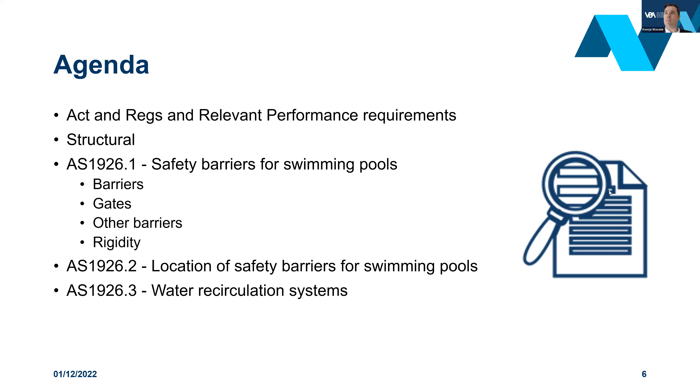So we've got our first poll question to come up, and hopefully most people have a bit of an idea about this one. Statistically, evidence shows us that the majority of drowning deaths in private swimming pools are children under 2, children under 5, or adults under the influence of alcohol.

We'll just wait for a few of the results to come through there. So just repeating that again: the statistical evidence shows us that the majority of drowning deaths in private swimming pools are children under 2, children under 5, or adults under the influence of alcohol. Hopefully we're getting some of those results coming through now.

All right, so hopefully we've got those results now coming up. And yeah, the majority of people have gone for children under 5, and that's the correct answer there. Adults under the influence of alcohol are highly represented in drownings in waterways and rivers and the like.

All right, so we'll move into the next part of the presentation. So just some background on the audits.

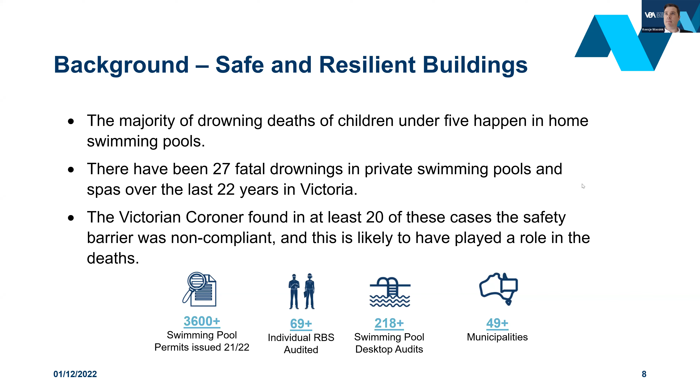So the regulatory requirements for swimming pools. A building permit must be obtained to build a new or alter an existing swimming pool. Regulation 28 of the Building Regulations 2018 sets out, among other things, that a building permit must clearly show the location of the swimming pool and spa and the barrier on the allotment, and demonstrate the barrier's compliance with these regulations. The building permit should also include the precautionary measures for both before and after the swimming pool is filled with water. This includes temporary fencing.

Swimming pool is a defined term in the Building Act. It means any excavation or structure, including a spa or relocatable structure, that is capable of containing water to a depth of 300 mil, and most importantly, that is principally used or that is designed, manufactured or adapted to be principally used for swimming, wading, paddling or similar activities.

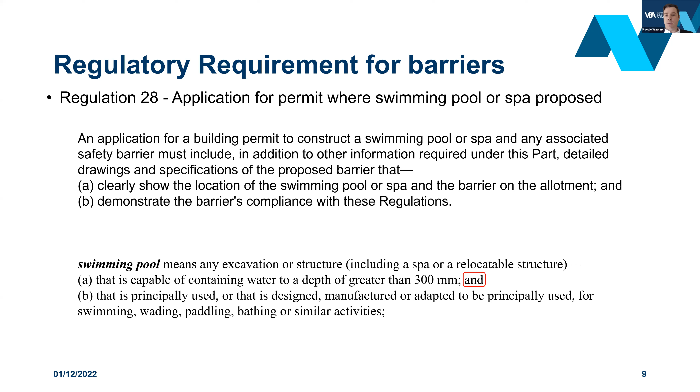Firstly, we'll discuss the performance requirements we considered as part of our audits to determine compliance with Regulation 28. The key considerations in the building code were performance requirement P2.1.1, structural stability and resistance; P2.2.4, drainage from swimming pools; P2.7.1, swimming pool access; and P2.7.2, swimming pool recirculation systems.

In the absence of a performance solution, the audit considered that a DTS solution was being adopted and considered whether compliance was demonstrated against the relevant DTS clause, including the Australian standard.

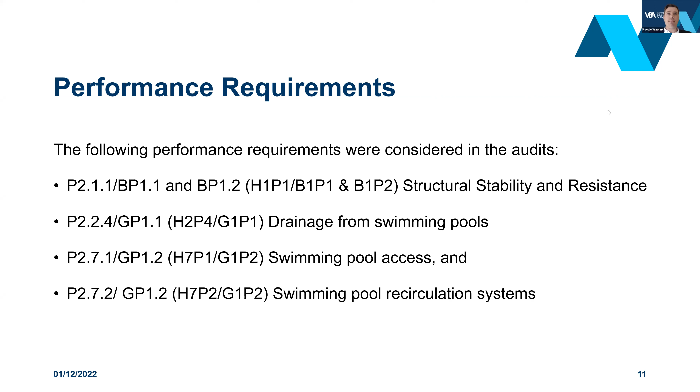So the top non-compliances, these are the ones where we did have sufficient information to see. These were the top non-compliances identified: gates swinging inward rather than outwards, landscaping features reducing the barrier height including steps and retaining walls, encroachments in non-climbable zones including pool equipment, and gaps under barriers not less than 100 mil.

Where these material non-compliances were identified, the RBS was required to provide evidence that the as-constructed pool was compliant.

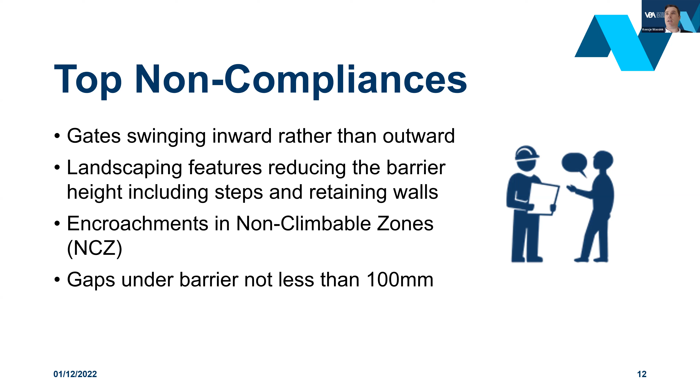We'll move into the first performance requirement we looked at, being P2.1.1, structural stability and resistance. The performance requirement in Volume 1 and Volume 2 are basically the same, and they set out a requirement for buildings and structures to comply structurally, including the design actions that must be considered. Depending on the form of construction, the performance requirement for structural could be satisfied using a DTS solution. The DTS options to satisfy the performance requirement are set out on the screen for each volume, and these requirements are consistent across the volumes. As I mentioned, in the top corner I've got the NCC 2022 version or equivalent.

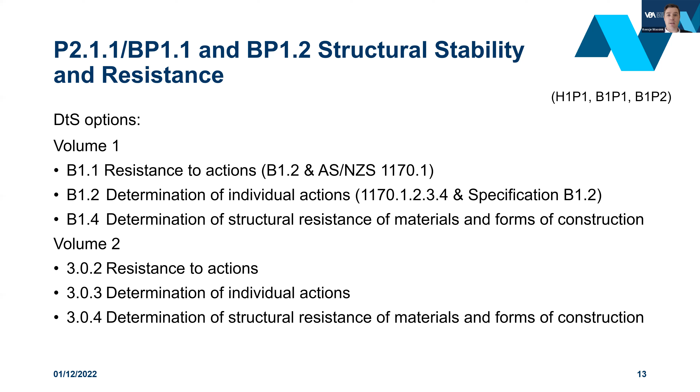In 88% of the audits, there was sufficient information to determine compliance for structural provisions. This is a really good outcome. Most RBSs here relied on certification from a structural engineer. These certifications were to AS 3600 for concrete pools and AS 1838 for fiberglass pools. It's noted that AS 1838 for fiberglass isn't actually a reference standard in the NCC, so it's not actually DTS, it's a performance solution. Currently we're working with the master pool builders to hopefully get this into the next NCC as a referenced standard so that it can be DTS in the future.

So some key considerations for structural when issuing permits and designing for swimming pools are AS 3600 for concrete pool design, AS 1838 for fiberglass pools, the bedding material used under the pools, the drainage around it, and standpipes around fiberglass pools to help reduce the water level, as well as the soil classification.

I think the soil classification is one of the really key things with swimming pools. It's important that when we get a fiberglass design or a concrete design from an engineer, we check it against the soil classification, and also make sure we've got the right drainage around the pool.

Because if the soil becomes too wet and expansive, it may cause pool heave and the pool coming out of the ground. We've seen a few VCAT cases where the soil is a lot wetter than expected, the pool's coming out of the ground or it's cracking, causing trouble for builders and clients as well.

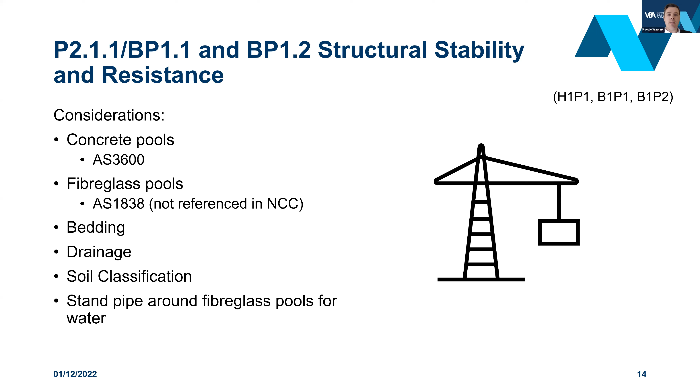So moving on to drainage requirements. P2.2.4 sets out drainage from swimming pools, stating that swimming pools must have adequate means of draining the pool in a manner which will not cause illness to people or affect other property. There are no deemed-to-satisfy provisions for swimming pool drainage in volume 1 and volume 2.

We're currently working with the master pool builders to develop a proposal for change to the NCC to introduce some deemed-to-satisfy solutions to help make this easier to deal with.

Whilst there's no DTS, the main way we saw this handled in 19 audits was to have a sewer connection - basically connecting the drainage part to the sewer.

When doing this, there's a few things that need to be considered. One is making sure you have approval from the relevant water authority, because in some circumstances the sewer system isn't actually adequate for handling drainage of a swimming pool, and the water authority won't allow it, so a different solution may be required.

Another thing is that volume 3, the plumbing code, does have a DTS pathway when using the sewer, but you'd first need to start with a performance solution in volume 1 or volume 2, and then the plumber can use the DTS provisions when installing that connection to the sewer.

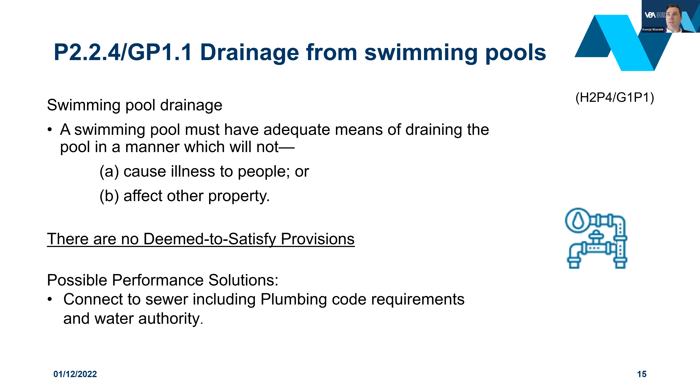So next we'll talk about swimming pool access, and this is going to be more about the barrier now.

Performance requirement P2.7.1 swimming pool access sets out that a barrier must be provided to a swimming pool and must be continuous for the full extent of the hazard, be of a strength and rigidity to withstand the foreseeable impact of people, restrict the access of young children to the pool and immediate pool surrounds, and have any gates and doors fitted with latching devices not readily operated by young children and constructed to automatically close and latch.

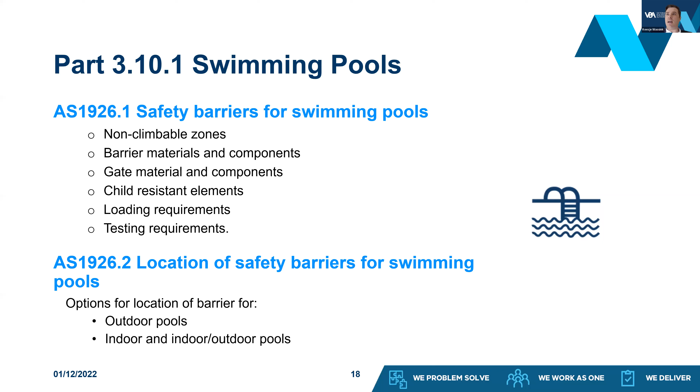The common trends we found, shown on the screen now, were generally for non-climbable zones: where there was sufficient information to determine compliance, the compliance was achieved. So that's really good - the plans were accurate when presented.

The non-compliances we did identify included pool pump equipment that would facilitate climbing in non-climbable zones, a retaining wall encroaching in the non-climbable zone and reducing the effective height of the barrier, an internal step encroaching into non-climbable zone 4 reducing the internal height of the barrier, and a boundary barrier that was 1700 rather than the required 1800.

With insufficient information to determine whether compliance was achieved: the height of all portions of the barrier not nominated - maybe they'd noted one side as 1200 but never specified the boundary barrier or similar; also not including the height of boundary barriers; and where barriers intersected with a boundary barrier, there was insufficient information to determine if the non-climbable zone had been complied with.

There were a lot of generic guides included in the permit documentation, but they were not relevant or contextualized, so it was unclear where the requirements needed to be implemented, left to the reader to interpret, which can lead to incorrect implementation on site. Our proactive inspection team has been out on site and found a lot of issues with barriers - I think there's a linkage where people have these lists of things they can do but don't actually know what they're meant to do in which area.

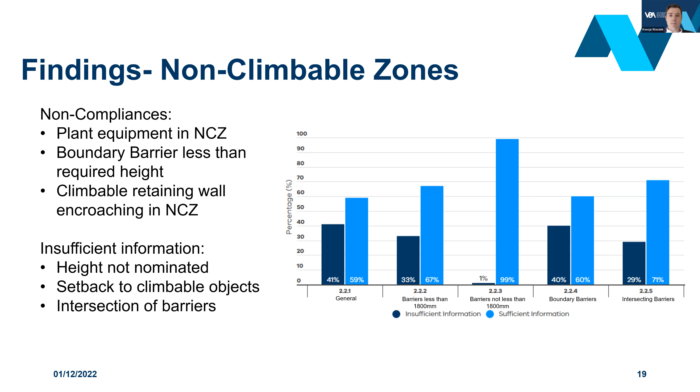So what is required for non-climbable zones? The plan should nominate the height of all sections of the barrier, the setback of any surrounding structures or items that may infringe on the non-climbable zone, and the intersection of barriers and the width of those barriers.

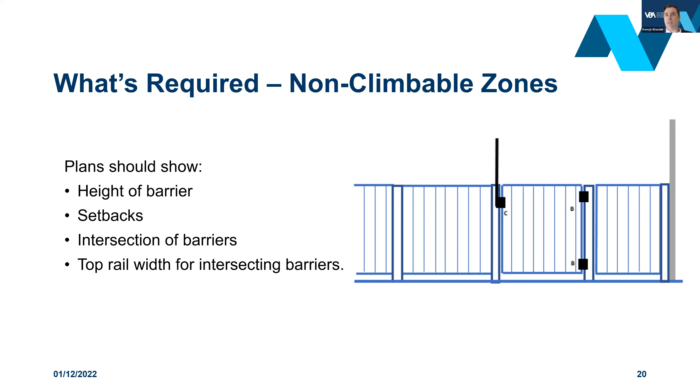I've got an example here, which one of my colleagues kindly helped with. This is an example of how a site plan might look, and it's quite detailed - we've got a few different scenarios going on here. When you're doing just a swimming pool you might not have as much information, but we've tried to cover off every possible scenario you might get in the standard.

With this pool, we can see it's got a 1200 high aluminium fence. There's a legend here, and we can see the east, south and west boundaries. So I know I need to check those have NCZ non-climbable zones for the 1200 high fencing.

I'll need to check that the rigidity testing of this element has been passed as well. I can see there's a boundary fence which is 1800 high, so I need to check it has the internal non-climbable zone of 900 down from the top of the boundary barrier, being non-climbable zone 5. I'd also need to check the width of the top rail or surface intersecting to make sure it's more than 50 mil wide.

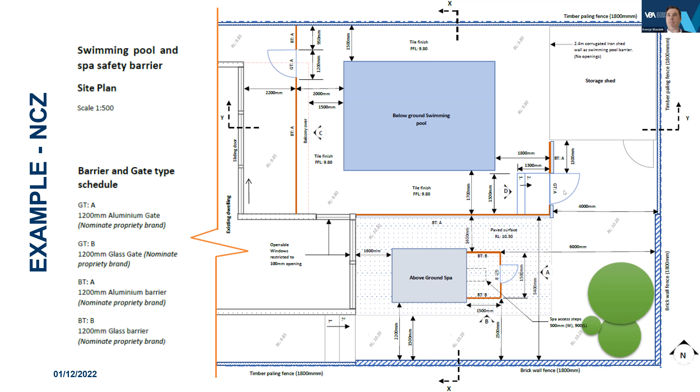So we'll move now to some of the findings with barriers. Like the non-climbable zone, the barrier section of the standard had high compliance rates where the information was detailed.

The need to have features and objects around the barrier identified on the plan, to ensure they do not facilitate climbing or encroach in the non-climbable zone, is highlighted in the coronial inquest into the death of baby Lauren. The barrier for the pool in which she drowned incorporated a barbecue structure. Whilst the coroner couldn't conclusively determine that is how access to the pool area was made, this structure incorporated features that may have facilitated climbing the fence and gaining unsupervised access to the pool area.

So one of the non-compliances we picked up with the pool barriers was the ground clearance between the barrier and the ground. On a particular site, the distance was 200, rather than less than 100 as required by the standard.

Also, with insufficient information, we had setbacks to features and objects near the barrier that may reduce the height, such as retaining walls, not shown. Glass barriers not specified to AS 1288. Fencing material was not nominated, so it couldn't be determined whether it was perforated material, or if there were surface projections or indentations, horizontal components within the non-climbable zone, or that gaps between vertical components were less than 100mm. Also, clearances between the bottom of the barrier and the ground weren't nominated on the plans.

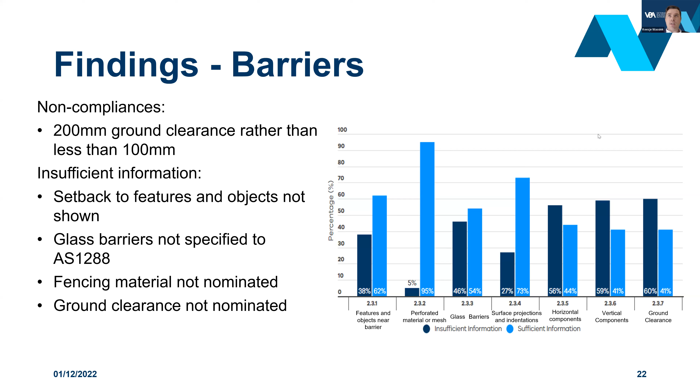So what's required for barriers? You should have setbacks to features around the barrier. The glass barrier should be specified to AS 1288. The fencing material should be nominated, including whether it's perforated material or mesh, and the spacing of any vertical or horizontal components. The ground clearance should be nominated as 100mm or less, with finished ground levels shown, especially where there's a level change on the plans.

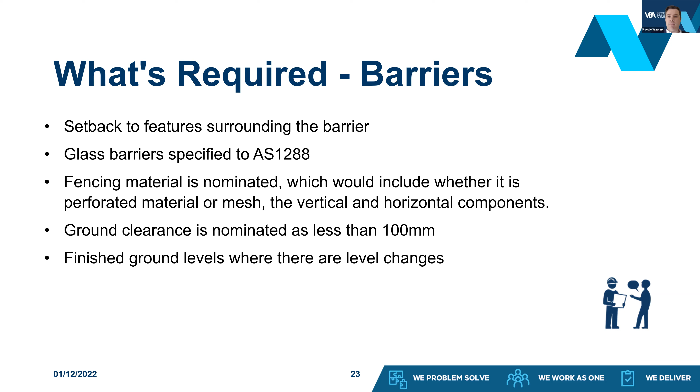So moving on to gates now. Gates are one of the most critical elements in pool barriers. It's acknowledged that most children who drown in a pool protected by a barrier gain access through the gate or door set. Therefore, it's crucial to ensure that the gate is compliant.

The importance of the gate latch was highlighted in the coronial inquest into the death of baby M in Melbourne's west. Baby M drowned in a home swimming pool that was fenced but had a faulty latch. Due to the faulty latch, the child was able to enter the pool area unsupervised. The failure of gate latches has also come into question in a number of other coronial inquests into children drowning. The coroner concluded in baby M's case that the death was preventable, which is why it's critical that when approving swimming pool barriers you have information on the gate latching device and hinges to ensure the product meets the required standard.

So some non-compliances we identified were inward swinging gates and the arc of operation of the gate not being clear. For missing information, we didn't have the gate's location, no details of which way the gate was meant to swing, no details of the ground clearance under the gate similar to the rest of the barrier, no details of the self-closing device or latch operation, and no details of shielding of the latch or the gap between vertical members where required.

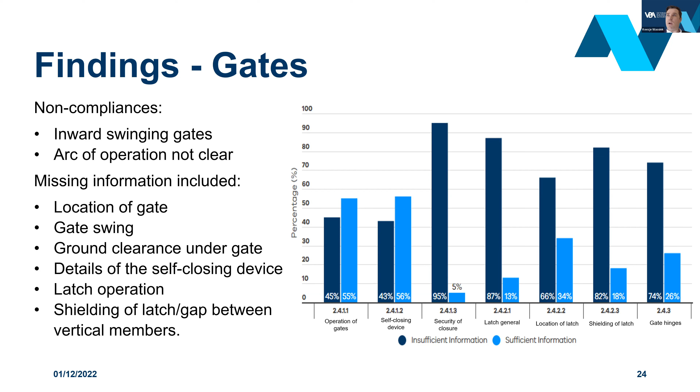So here's another poll question, this one's about gates. When a gate unit is tested in accordance with Appendix F of the standard, it should be capable of complying with the standard after how many operations? A) 1,000, B) 5,000, C) 10,000, D) 100,000. So this is about how many times the gate should be able to operate effectively, opening and closing and latching, before it fails.

I think one of the outcomes of the other coronial inquest was that the coroner suggested looking into these testing requirements, because the gate hinge may have been the reason why the gate hadn't latched properly and allowed the child access to the swimming pool area.

Hopefully everyone's getting some answers in. All right, so we got a mix of results there, and 63%, the majority, are on the mark. It's 10,000 operations that it needs to comply with.

All right, so we'll move on to what's required now for gates. The plan should show the gate location and that the gate is outward swinging. The gate self-closing device should be nominated. The latch that will automatically operate on the gate closing and prevent it from being opened without being manually released should be shown, along with the latch location. If the latch is less than 1,500mm, there shouldn't be any openings greater than 10mm, or the latch should be shielded. The gate hinges should be specified, and the ground clearance of the gate should be specified.

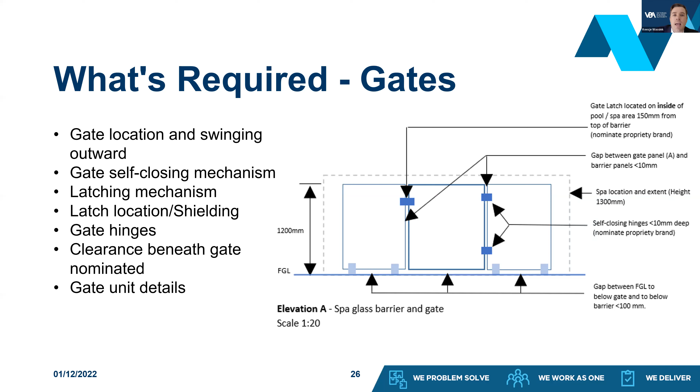I can see that the ground clearance is less than 100 mil. There are still a few other items I'll need to check off from some of the other plans, and we saw on the other plan that the gate was swinging outward and the arc was clear. I'd also need to look at the evidence of suitability for the gate unit, and with this one that's been specified, the glass is specified to AS 1288. So now moving on to other barrier components.

Some non-compliances we found here were a pool wall that was 1 metre rather than 1200 being used as part of the barrier. And for missing information, we had retaining wall heights not shown, pool wall heights not shown were utilised as part of the barrier - this is similar to the spa we had in our first example. There were also no details of the child-resistant openable portion of the windows, and no details on the setback of the balcony overhang, so we couldn't work out whether the balcony needed to comply or was outside of the non-climbable zone.

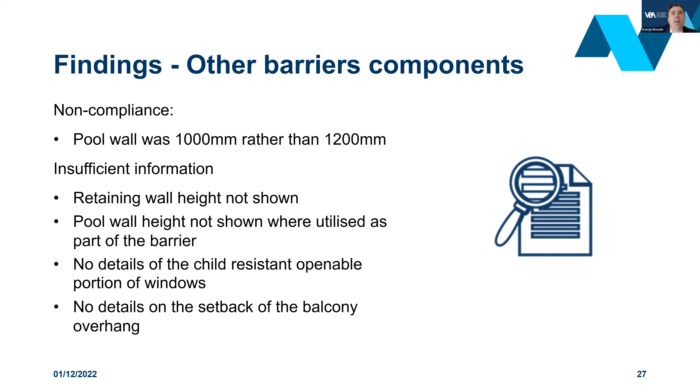So what's required for other barriers? We should have the finished ground levels, height of the retaining wall, details of the child-resistant openable portions of windows, details of child-resistant door sets - this wouldn't obviously apply to an outdoor pool, but it would apply to indoor and indoor-outdoor pools - details of any balconies and their setbacks, and also pool and spa wall heights when they're incorporated into the design.

So we've got this example on the screen here, and I can see from the site plan that the spa wall is part of the barrier, and that it's 1300 high. There was also a window that was going to be restricted to 100 mil, so I'd need to check that and make sure it's got that restriction with the tool and it can't be opened.

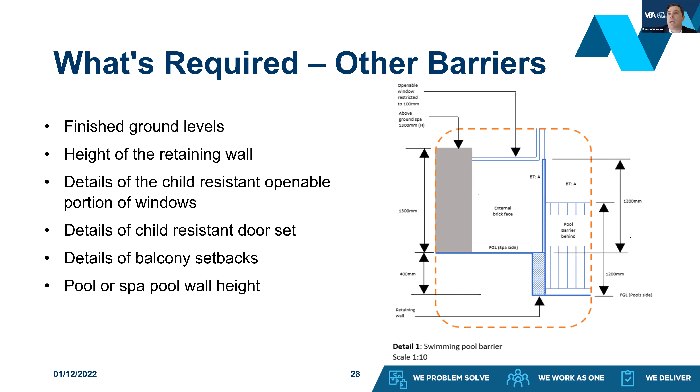Moving on now to section 3 of AS 1926.1, that's the loading requirements, and this is basically the loading for the materials that we're using in the fencing.

Where test reports were provided, these were accurate and demonstrated compliance. Generally though, there was no evidence that the material would comply with these tests due to a lack of evidence of suitability, and the material also hadn't been nominated to start with, so we didn't know if it was glass or aluminium or timber or something else.

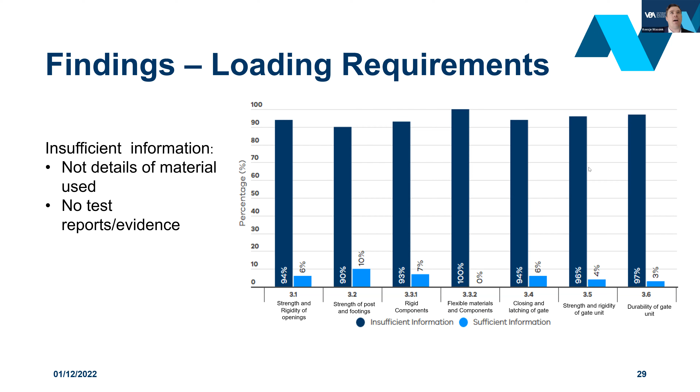So we've got another question coming up now, to do with loading and rigidity. The question is, do you need to test a glass barrier against the Appendix C strength test for rigid barrier components? Appendix C sets out the requirements for how we test barrier components to make sure they will be suitable for use.

Hopefully that's popping up on the screen now. I'm not sure if it's come up yet. Yep, there we go - just yes or no, do you think a glass barrier needs to be tested to Appendix C?

Hopefully everyone's getting their answers in. We know from earlier on that we talked about glass barriers needing to be designed to AS 1288. We'll close this poll off quickly and we should have the results up now.

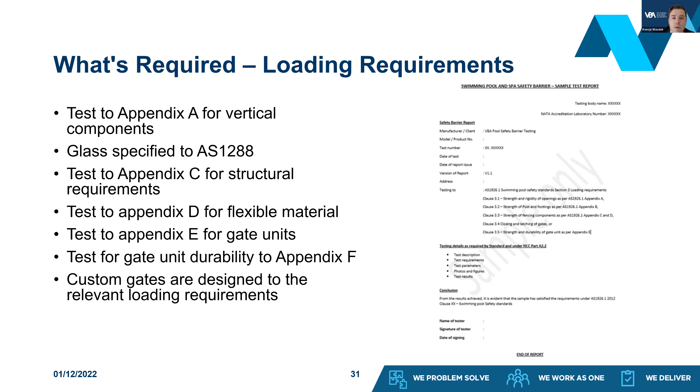Moving on now to the last part of the requirements. Performance requirement P2.7.2 swimming pool recirculation systems sets out that a swimming pool water recirculation system must incorporate safety measures to avoid entrapment of or injury to a person.

Part 3.10.1 swimming pools specifies that P2.7.2 for water recirculation systems can be satisfied via DTS solution by complying with AS 1926.3. AS 1926.3 sets out the requirements for skimmer boxes and other permanent water outlets in swimming pools and spas, and includes the sizing of skimmer box components, materials, testing requirements for outlet covers, and testing for alternative skimming systems.

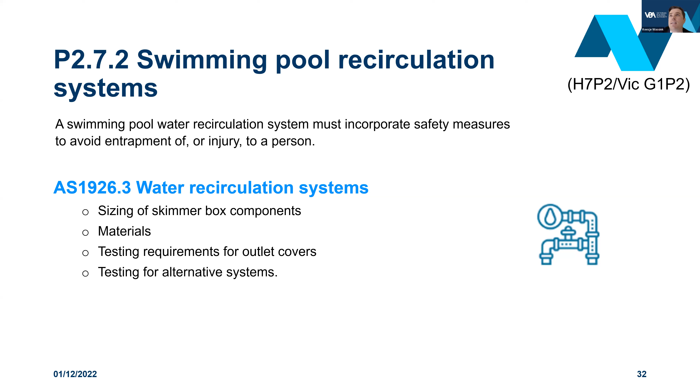What we found with water recirculation is there was basically not a lot of information in a lot of the plans. Where there was sufficient information with test reports to support the product being used, they were compliant. The common trends were no details of water recirculation devices, or only a manufacturer's brochure had been provided, which did not show any details of the system, how it complied, what size it was, the test reports that show it works and meets the standard, and also not having sizes of coverings and openings.

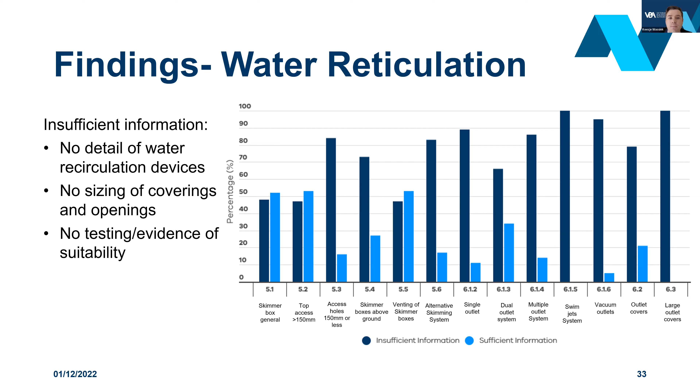So I'll go now on to what's required for this: the sizing of the skimmer box components, including the top access hole size, skimmer box venting systems, what materials are being used in the skimmer box, testing requirements for the outlet covers, and testing for alternative systems where they're used.

Where required, the basket access hole is set back at least 100 from the edge of the pool. This should be shown on the plans - when you've got a skimming system with this, you need to show where it is and the setback from the pool edge. In one of our audits - actually two, from the same building surveyor - everything was perfectly right, and this one little thing was missed. So that's one to watch out for.

And the importance with the water recirculation is to avoid entrapment. There have been a few drownings, or near drownings, and they weren't actually kids - they were adults swimming in the pool who got their hair or something trapped in it, and they got caught under the water and couldn't resurface.

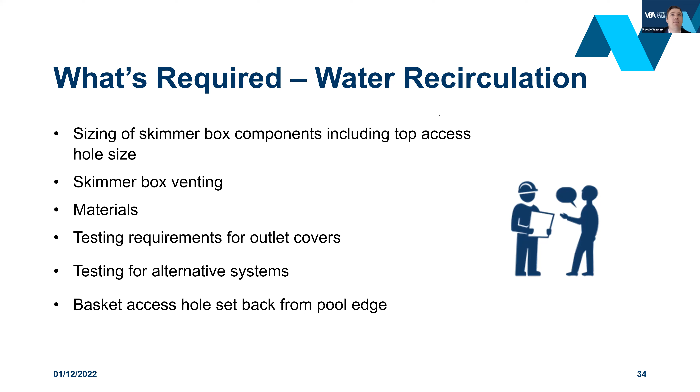All right, so the last thing I will talk about, and this is kind of outside of what we audited, but it's something that's popping up in prevalence now with people looking for different and more eco ways of designing their pools - these are your natural pools, your swimming ponds, or your recreation ponds that are used for recreational activities such as wading, swimming, paddling, bathing, and they're starting to grow in popularity. These are the kind of pools that maybe have plants in them or fish as alternative ways than using chemicals to treat the water.

Now, whilst they may look different from that traditional swimming pool because they've got plants in them or fish or rocks, their function is still the same, and therefore they are defined as swimming pools.

As I mentioned at the start, swimming pool is a defined term in the Building Act, and it means an excavation or structure that is capable of containing water to a depth greater than 300 mil.

A dam is this, but a dam isn't required to comply, because the second part of the definition, which is the most important part, says 'and'.

That is principally used, or designed, manufactured, or adapted to be principally used for swimming, wading, paddling, bathing, or similar activities. So we can differentiate between a dam and just an ornamental pond versus these recreational swimming ponds, because of the 'and' part.

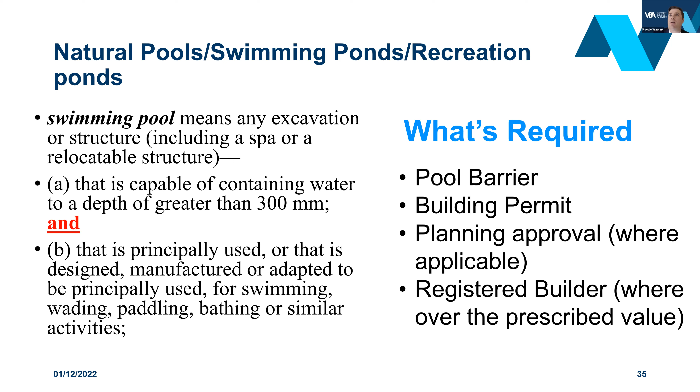Just lastly, I'll wrap up with a few things we need to look out for. The key ones we have are obviously the non-climbable zones, but I think most people are getting that right when they have the information. These are some of the other ones we maybe think about a little less, like balcony overhang.

It's important to know whether an existing dwelling is single or double story, so we can check the elevation to see if there are any overhangs or areas where people could enter the pool from above. Having the material and fence heights nominated for all portions of the barrier means that when we're out on site, we know this part needs to be 1200, this needs to be 1800, and so on, depending on climbability.

Any openings in walls used as part of the barriers need to be detailed, including windows. We saw in that example with the shed, we had a note saying there was no opening, so we knew that was fine.

Having the landscaping features that might reduce the height detailed, e.g. steps, garden edges, and walls. We've seen this on some of our audits where there's a garden bed with no heights shown about the garden bed edging, which could have been used as a step and reduced the height of the barrier.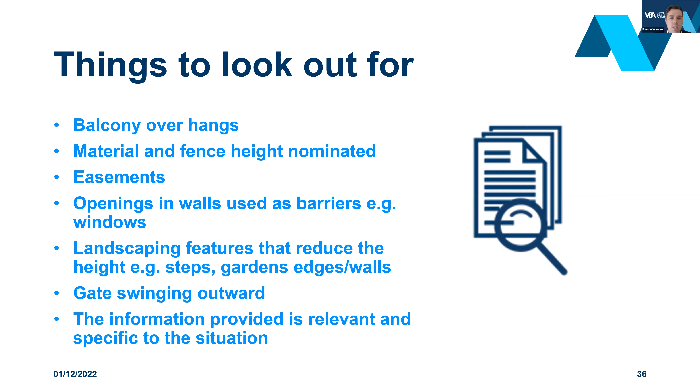So what are the next steps from here? Hopefully from this presentation, you've gained an understanding of what information is required to ensure that the swimming pool and swimming pool barrier permit will be compliant.

By getting the plans right, we can hopefully avoid issues arising on site with the as-constructed work that consumes time and money and may require costly rectification, or the owner or client being upset. This will help ensure that the pool barriers are compliant and we can play our part in reducing pool drownings.

At the VBA, we will continue to monitor swimming pool permits to ensure there is an improvement in the quality of the permits, and also continue to educate those in the industry on what is required. We're also currently working with the master pool builders and other industry groups to educate and make changes to the code that will make the approval process easier and ensure that safety standards are maintained.

Also, we're developing further guidance to assist industry in understanding what is required, and we'll include some worked examples of what's required, as we've shown already through the presentation, so people can look at them and see what they should be doing or having on the plans.